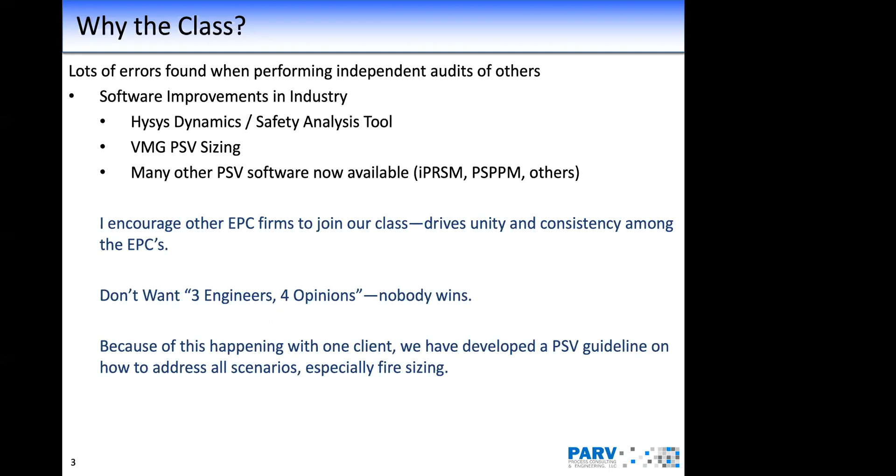One thing I want to point out that's usually a misunderstanding about PSVs and fire sizing is that PSVs don't necessarily prevent the tower or the vessel from yielding or exploding during a fire event.

And again, it was properly protected with a PSV, but the heat of the metal wall temperature eventually yielded to the temperatures and the pressure inside. So please don't think that if you have a PSV on a vessel for fire sizing and it's appropriately sized, that you're not going to have an exploding vessel.

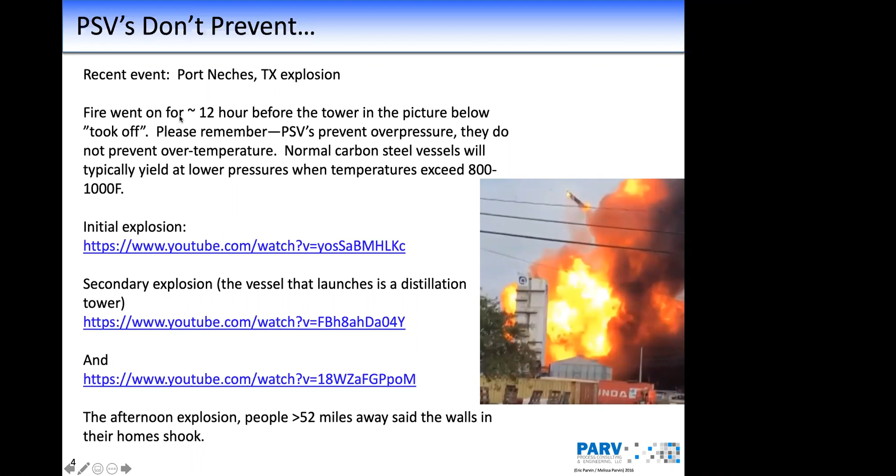I also have in our training class several other events where people are filming a fire going on, the explosion occurs, and then the vessel literally lands about 10 feet to the left of them. It's really something to behold. Not a fun feeling, but if you see a fire happening in your facility, don't be comforted by the fact they have PSVs.

You should just follow your procedures and get wherever you need to be safe. Another thing that we see in the upstream world is a lot of folks actually try to dismiss the fire case. There's no one right or wrong answer, but the question comes up all the time: can I dismiss the fire case? In short, if you're in a code compliant state, you have to follow ASME requirements. ASME says if there are no flammables around, you can dismiss it with appropriate multidisciplinary sign off, and there's some other requirements listed in the ASME code.

A good example of this is like an instrument air receiver that's located maybe 500 feet away from any hydrocarbon source. Maybe you can, in that scenario, dismiss the fire case. If there's any flammables around, though, then the short answer is you need a fire case, period. You need a fire case on your PSV. We have seen several upstream clients dismiss the fire as not needing to size it, and that's just a corporate risk decision if they make that decision.

Fabricators for heater treaters or other upstream common vessels, whenever we're trying to provide a nozzle for your PSV, very often the PSV nozzle is too small for the right size PSV. Special note here: fabricators are not necessarily responsible for sizing this. Sort of like if you buy a tower with an internal flange for your distributor pipe, the question becomes who buys the gasket for that flange? The internal vendor doesn't provide it, the fabricator doesn't provide it. The owner is responsible for making sure that gasket is purchased and installed.

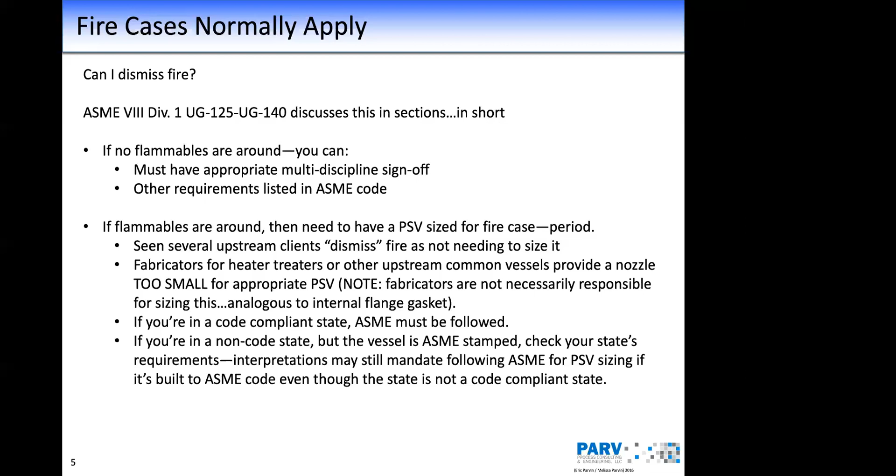So let's get down to the equations, which is what a lot of people love.

We usually have to first determine the heat flux into a material to make it boil. This is a very familiar equation. Your C factor for this equation for heat flux is 21,000 or it's 34,500. The environmental factor we're not going to discuss today. Your wetted surface area is the area inside the vessel where the liquid absorbs heat. Most commonly, we see Q is equal to 21,000 times the area to the 0.82 power. However, I want to highlight there's a lot of assumptions in that 21,000 number we want to make sure people are aware of.

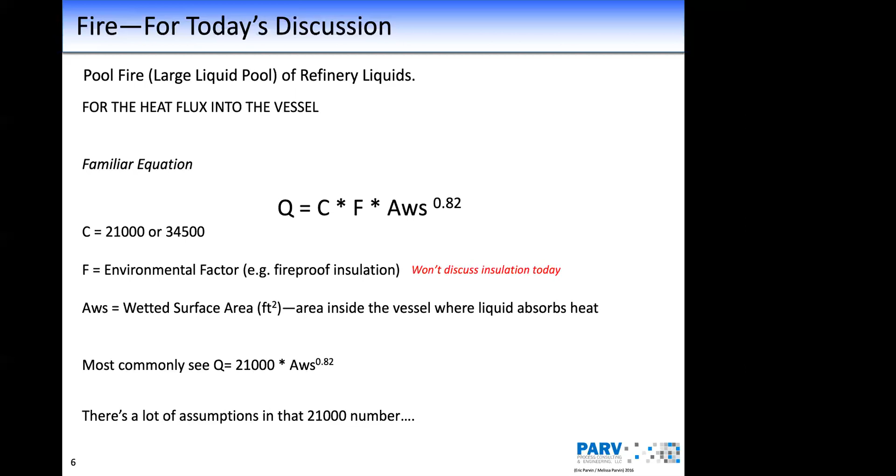If you have both, you can use the 21,000 number. If you're absent of either one of these assumptions, then you're required to actually use the 34,500 number. This is nearly a 65% increase in the heat flux calculation for what's going to be boiling inside your vessel. So please be aware, one of the common mistakes we find, especially in upstream, is that people are just on autopilot using 21,000 when they should be using 34,500, and they underreport the area required by over 60%.

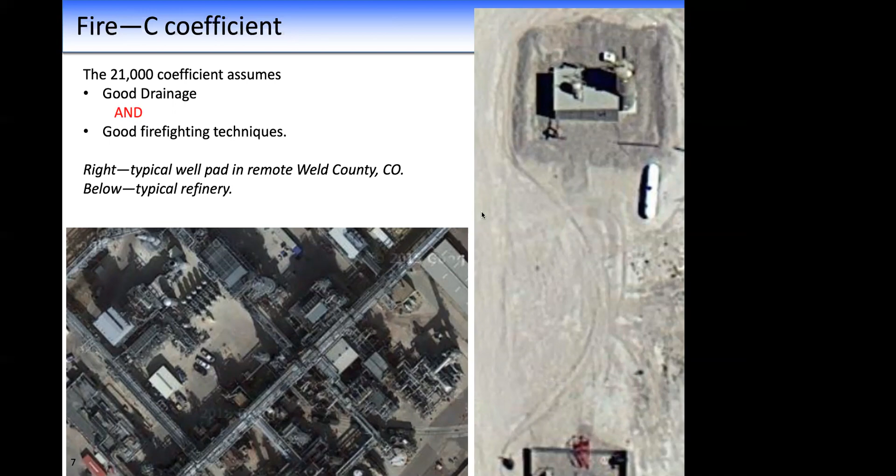Also want to highlight the wetted area factor as a common area where we find mistakes. The liquid level that you assume inside your vessel—oftentimes people just assume the high liquid level, they're on autopilot, and they just move on. What level do you have to use? API 521 provides some good guidance on this.

There's a few references you can look at later. For example, in towers you can use the normal liquid level plus the height of all the liquid on the trays above. For working storage, they recommend using maximum liquid level. In a heater treater, I like to use whatever liquid level is there from the internals—it just depends on your vessel. But if you can use the normal liquid level instead of the high liquid level, for example on towers, you can have a significant reduction in the amount of wetted surface area, and reduce your PSV size required.

Another thing commonly missed is people will include the heads inside of skirts, say for example on towers. API gives you a get-out-of-jail-free card right here, saying you can neglect the area of the bottom head inside of a skirt. The reason is that you don't usually have good air circulation inside, and impingement of the flames on the head in the skirt is minimal, so you can dismiss that wetted area. We see that forgotten many times—that's just another mistake we find.

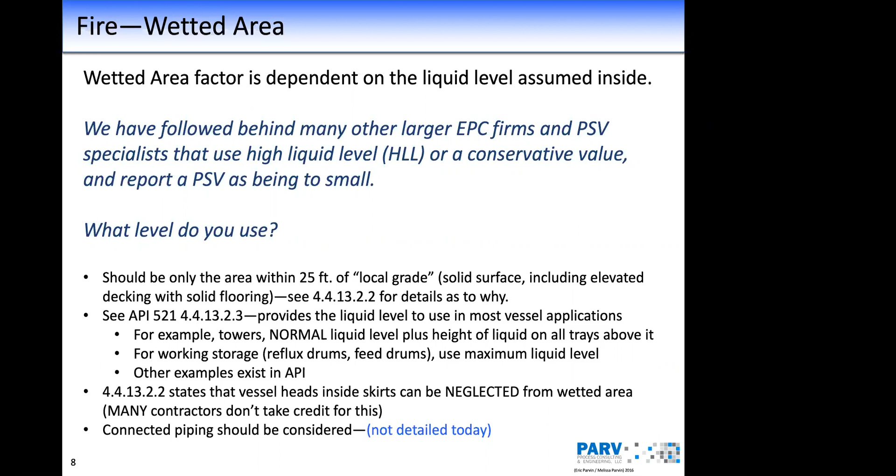Rarely noticed in API 521 in this section is the fact that if your vessel is in a confined area—for example, a heater treater inside a small building to protect it from the weather elements, which we see in Colorado and North Dakota and other places—let's say you have several pieces of equipment inside a compressor house with vessels inside there. Your wetted area calculation, instead of raising the wetted area to 0.82, API says it should be changed to an exponent of 1. This greatly increases the heat flux into the vessel, and it's a common mistake we find, especially in upstream and inside special areas of refineries.

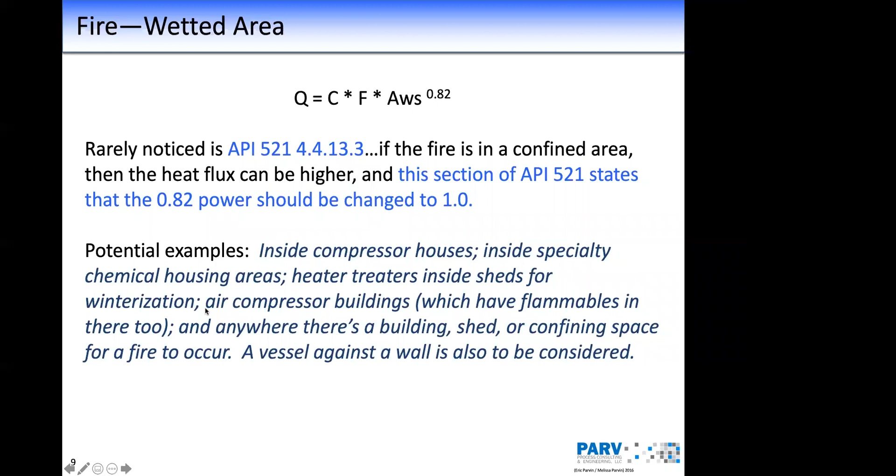Another thing we find is, say you have one PSV protecting multiple pieces of equipment simultaneously. We've seen on about half of the audits we do, going behind other companies, they'll actually add up the wetted area of all the vessels and raise it to the 0.82 power. The right way is doing each area raised to the 0.82 power individually and then adding up all those terms together to get the right answer. On this simple example we have here, it makes a difference of about 20% in your heat flux.

So we've seen people actually miss the heat flux value in some cases by more than 30% when doing an independent audit. Make sure this detail is captured if you have a PSV protecting more than one piece of equipment. API has commented on this previously with inquiries, and they usually get the same inquiry about every 5 years, so it's a common mistake to find, and it's something API does address—they're adding language to clarify this in writing in an upcoming edition within the next year.

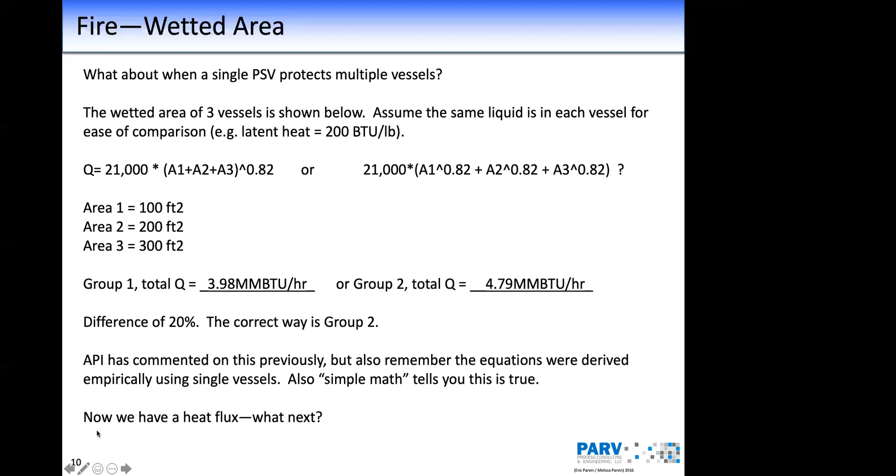So now we've gone over some of the heat flux issues. What's the next thing we do? Very commonly, we just say the heat flux divided by the latent heat, and that gives us the mass flow that we need for the PSV. One of the hot debates we come across a lot, from engineering company to engineering company, is: what is the latent heat?

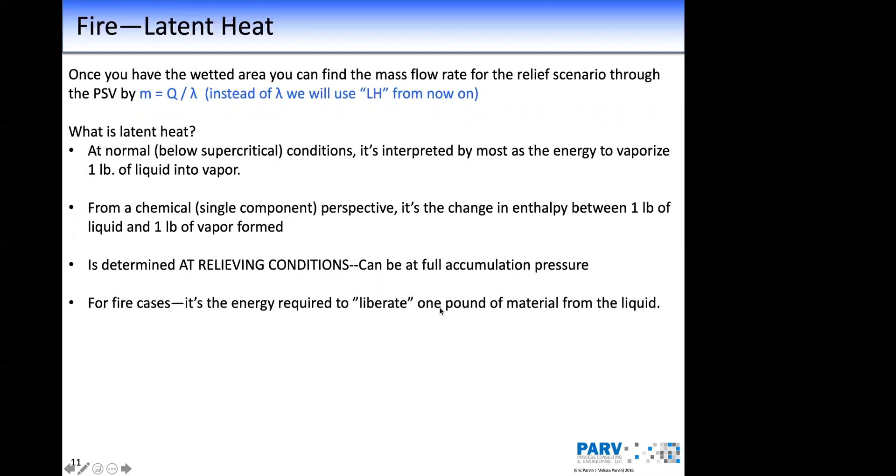At school, it's the energy required to change 1 pound of liquid into a pound of vapor. However, for a multi-component mixture, this becomes a little trickier, especially for a fire sizing case. So we always want to make sure that we're liberating 1 pound of material from the liquid to determine our latent heat.

API discusses this in this section of 521, and it goes through a lot of paragraphs to say ultimately there is not a standard latent heat effect, but sometimes you have degassing or dissolution effects causing a higher latent heat than what your simulation property tab will tell you. Also, there's a paragraph saying that multi-component mixtures have a wide boiling range, and it might be necessary to develop a time-dependent model where total heat input to the vessel not only causes vaporization, but also raises the temperature of the remaining liquid, keeping it at its boiling point.

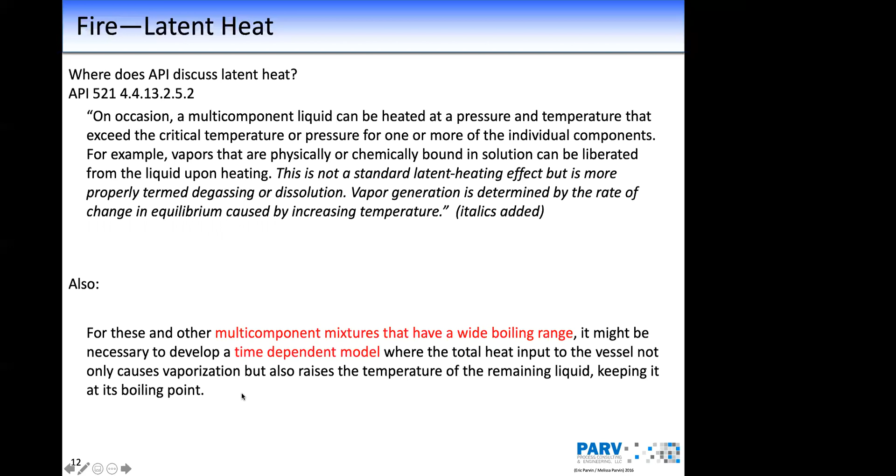In other words, you have sensible heat effects going into a multi-component mixture of liquid that's being boiled. So you actually need to consider the MCP delta T as well as the M lambda H. Most engineering companies look at just the latent heat effect, or your lambda, and they ignore this MCP delta T. Now, is it wrong? Not necessarily, but it's very conservative.

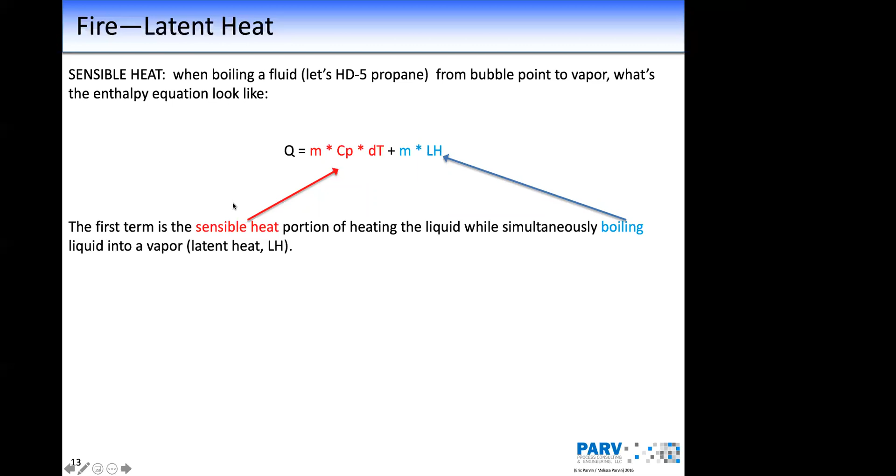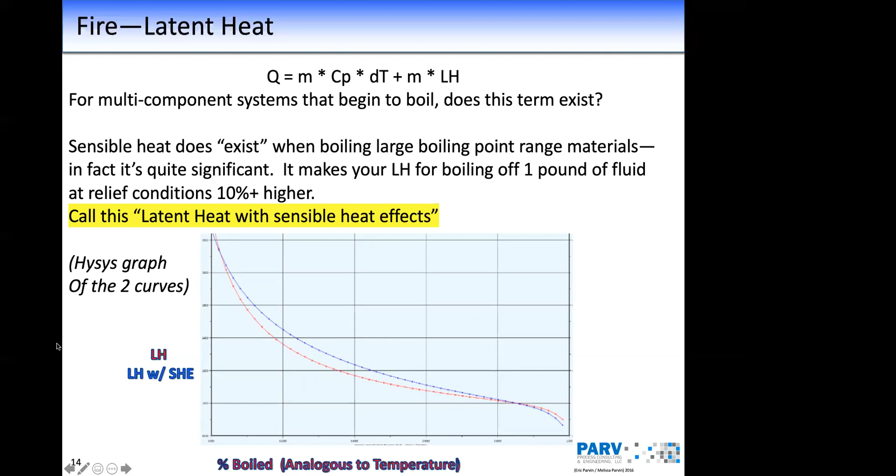And even with the stream being mostly propane, you do see this effect occurring. This specific example, the latent heat with sensible heat effects, is approximately 5 to 10% higher than the latent heat out of the property tab in your stream window.

For multi-component systems, the other thing we need to remember is, as your temperature increases and you're boiling more material off, typically your PSV area required increases. But also, as your temperature increases, the latent heat reduces, so your PSV area required increases a little bit more. As your temperature increases, molecular weight increases, so your PSV area required according to this heuristic decreases slightly.

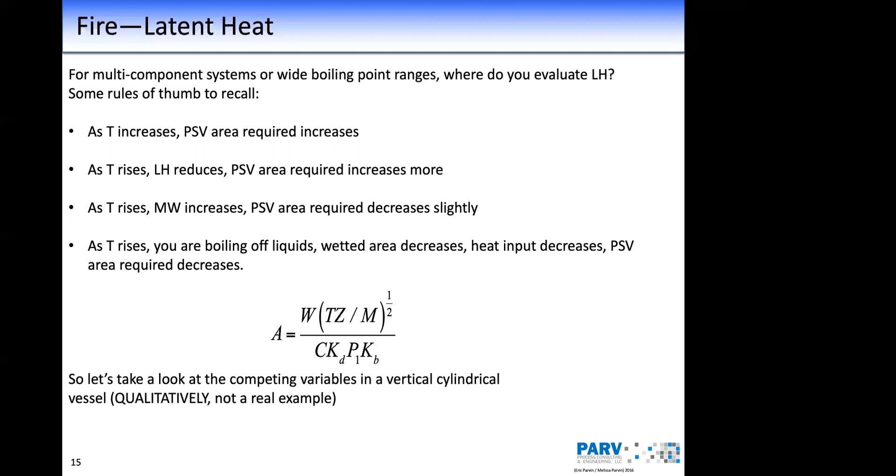As temperature increases, you're boiling off liquids, so guess what? The other thing changing is your wetted area is actually decreasing, so the heat input decreases, your PSV area required decreases. So you have a lot of moving parts that you need to try to consider simultaneously, and it's actually difficult to do by hand.

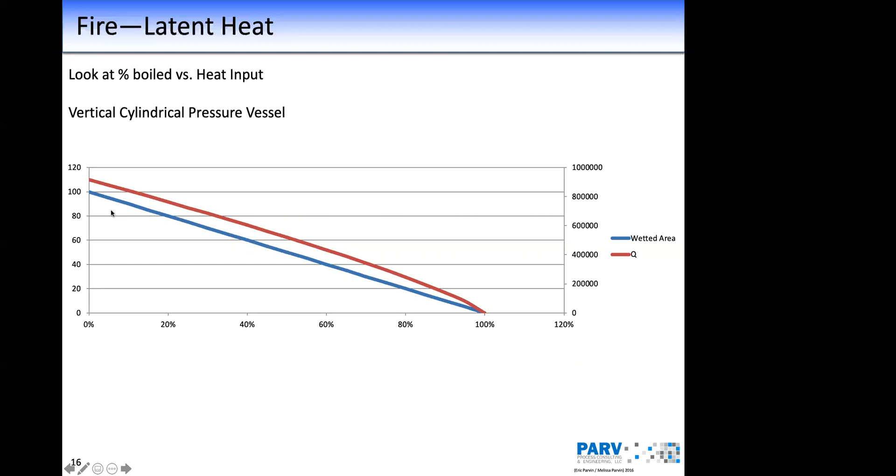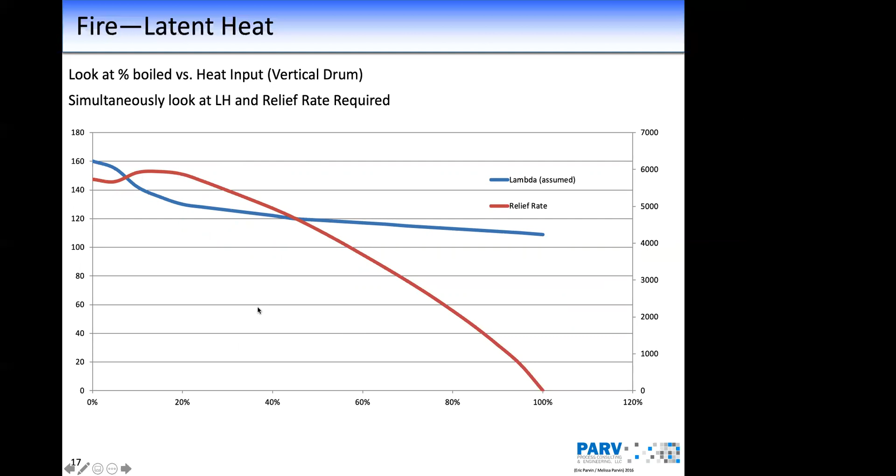So we're going to walk through some examples of what that would look like if you did try to do this by hand. Here's a very simple vertical cylindrical pressure vessel. If you look at the amount of liquid boiled off versus the heat input, these are what the curves look like. If you were to look at the latent heat in the blue curve and the relief rate required in the red curve, you see you actually have a mass flow peak around the 15 to 20% mark.

So that's a little bit hard to estimate by hand, but you can if you do a lot of work on it. Ultimately, though, what you're trying to go for is the PSV area required as you're boiling off that material inside the vessel.

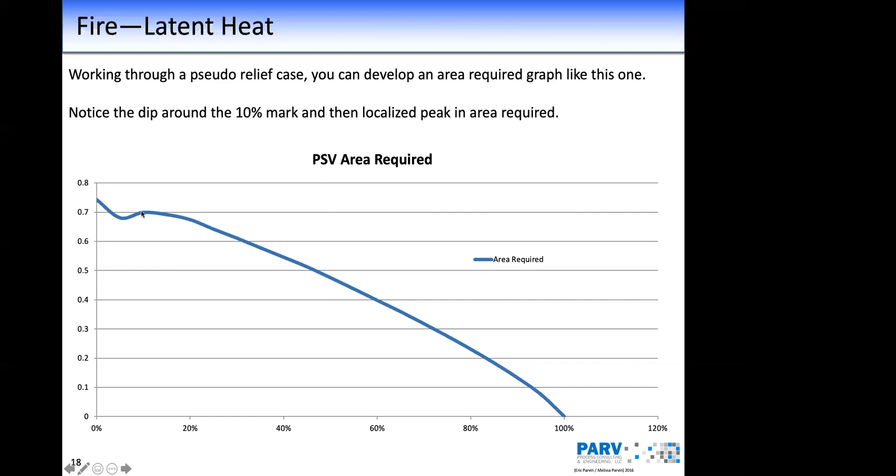We tend to ignore the first 1 or 2% because the amount of liquid boiled off in order to bring the vessel to overpressure would usually consume this first little bit. In this case, our peak looks like it's around the 10% mark. However, we have seen curves that look like this, where your PSV area required peaks out usually somewhere beyond the 20% mark. This green curve, I have the example of here shortly.

We have come across this in refineries quite often, especially on diesel systems, where your area required peaks at somewhere between the 30 and 70% mark of boil off. So please understand, if you or your contracting firm makes a decision just to use the 10% mark for boil off, you might be missing the peak area required.

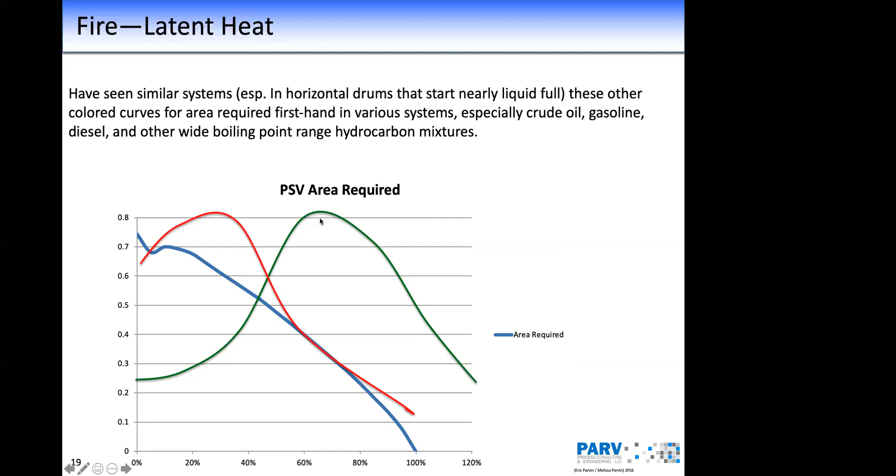So how do you actually determine that? There are 4 popular ways we've seen in the industry over the last 20 years.

If methane's involved, you're talking negative hundreds of degrees. We've seen people set up 100 drums and 100 latent heats. We don't show that here—it's very tedious and requires a lot of time. You can also set up a case study with 1 drum and walk through the procedure we have here. This picture is available if you want to geek out and set this up later. That's what we call method D, our preferred method to determine the true latent heat for a fire case.

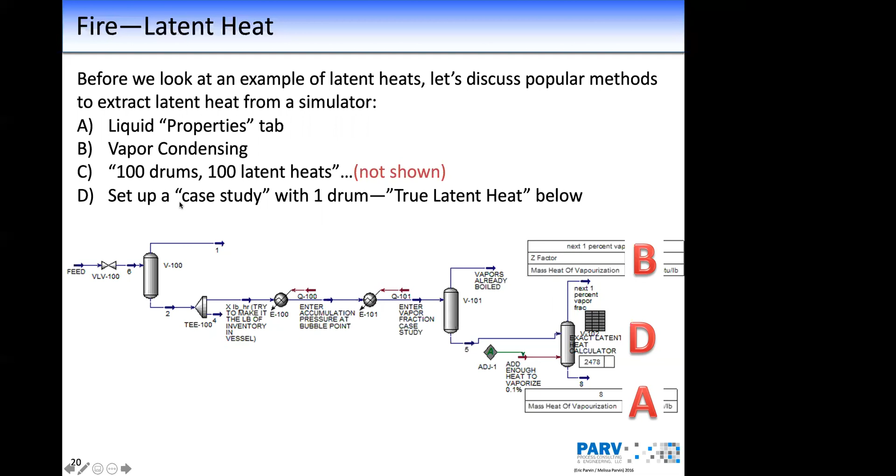The other thing to point out is with methane concentration, which is very common in the upstream world, your latent heat from method D is going to be very different between method A and B. Your physical property tab—taking a pound of the entire liquid and vaporizing it—tells you, in this case, 167. The vapor being liberated and then recondensed tells you 393. These are two very different numbers, two very different approaches.

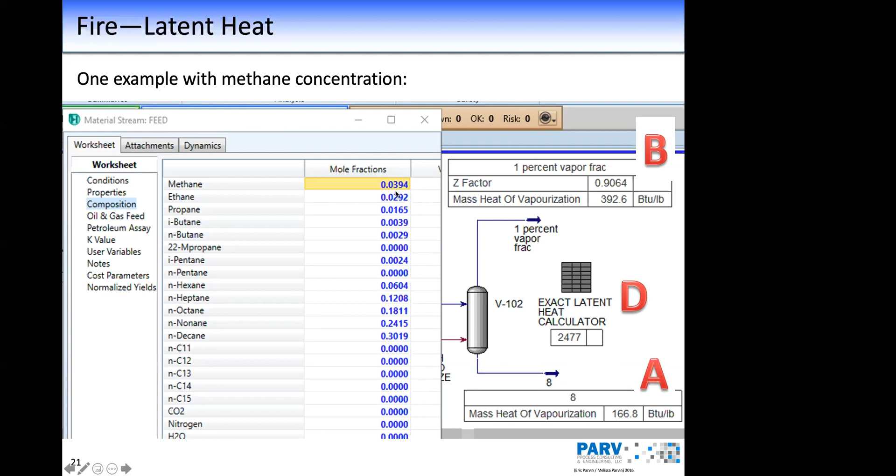Whereas the number we come up with says 2,500, which is a lot higher than water. Immediately a lot of people think, wait a minute, that's got to be wrong. But in reality it's actually correct, because you're fighting dissolution and not necessarily a true latent heat. So your curve across the entire boiling point range is going to look like this when methane is involved.

Now why is this important to know? For sizing a PSV, for example, on a heater treater or anything in the upstream world, this dissolution effect is significant. It can cause you to have a much smaller PSV than what some EPC firms will tell you to use, especially if you're using the property tab window out of the simulation. Down at the 50% boil-off range, you're off by a factor of 3 or 4—it's a significant difference. So definitely consider this if you're seeing large PSVs being cranked out by your EPC firm.

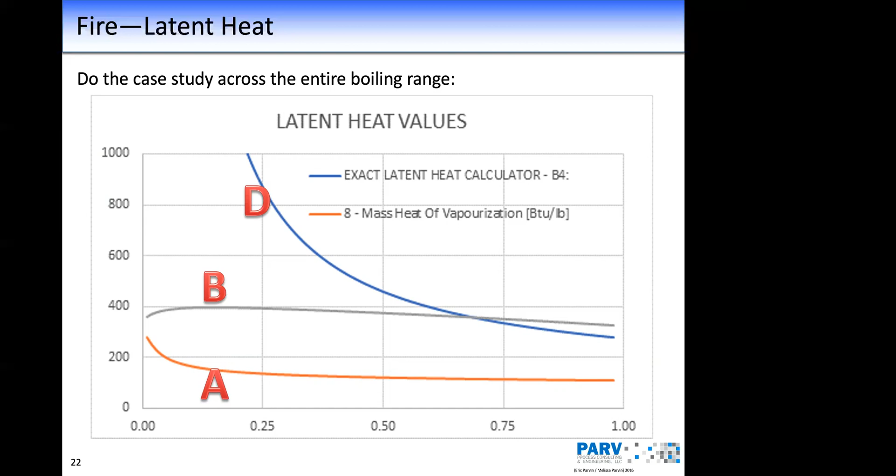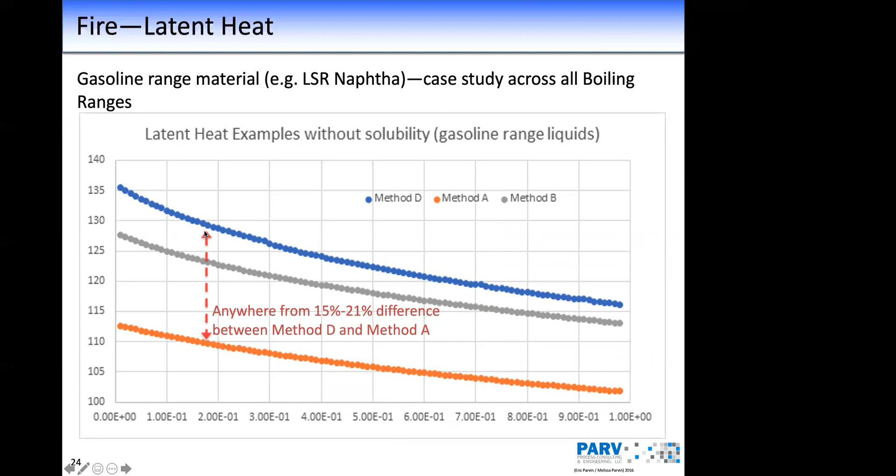Let's shift to gasoline range material. How different is the effect? In this case, not as different, but it's still about a 15 to 20% difference between using the physical property tab and actually calculating the sensible heat effect. So for methane solubility, if you have ethane, like in a fractionation, it's still a big difference, especially in the first 10 to 20% boiling point range.

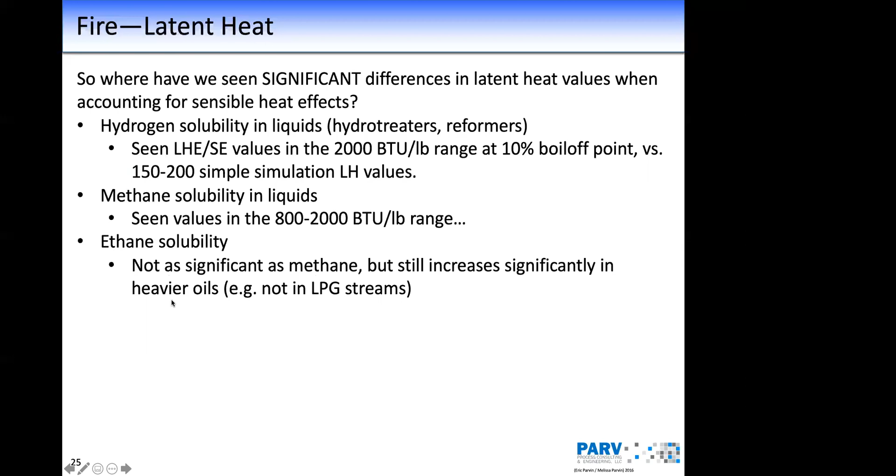How do you review this detail yourself? A few options in the industry exist. HYSYS actually has a really good safety analysis tool. You can program a PSV, put in the properties for set point and all that. So long as you don't cross the supercritical range—HYSYS defaults at your compressibility factor being less than 0.8—you can run a semi-dynamic analysis. You tell it vapor, semi-dynamic analysis, click on the edit flash table, and you get this report.

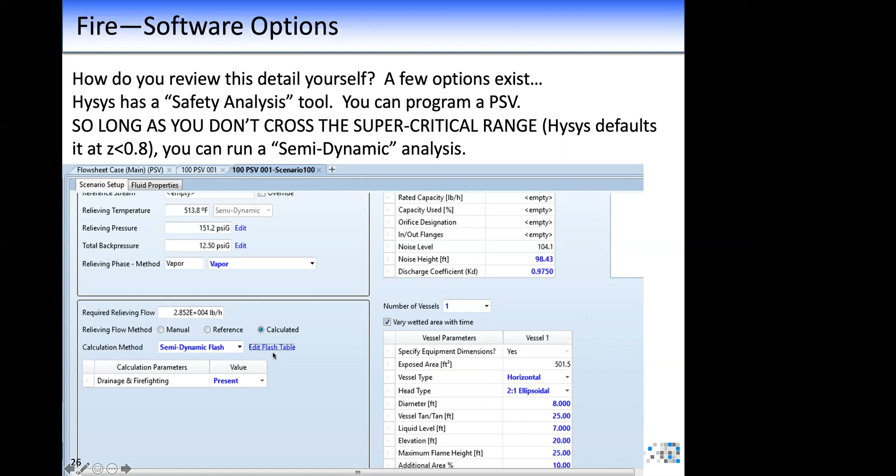This is for diesel. For the first 10%, which is where a lot of companies just stop evaluating the fire, you get an area required of 0.36 inches squared. But really the controlling point is when 60% of the material is boiled off. It happens an hour and a half after the fire starts, but it's your maximum PSV capacity. We actually go a little past the J-size PSV according to API sizing. So this is the kind of tool available to you in the market—it's very easy to use and relatively intuitive.

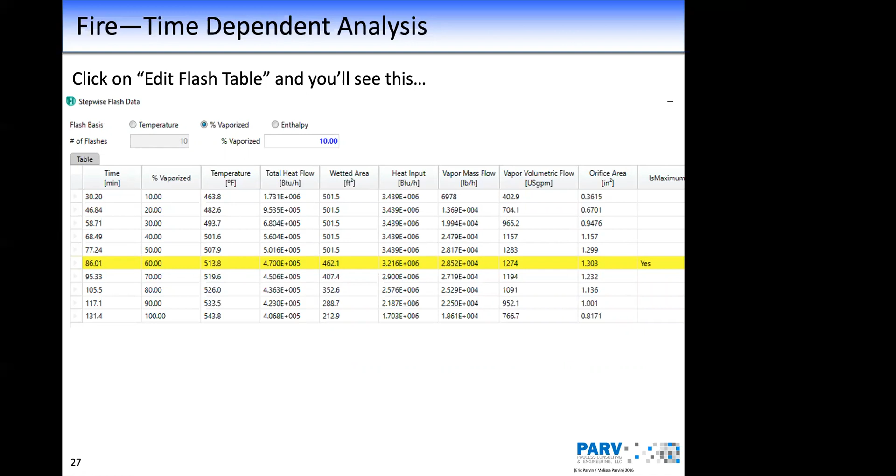However, it's extremely conservative and requires some manual intervention to get the right answer. If you're using iPRSM, please use it with a grain of salt and do some quality checking. It doesn't consider the reduction in wetted area as it goes down, at least not that I'm aware of. I've never come across a client that knows how to look at that properly to reduce the wetted area while the fire goes on. It does a good job evaluating the other physical properties, but be careful believing its final result without doing some scrutiny.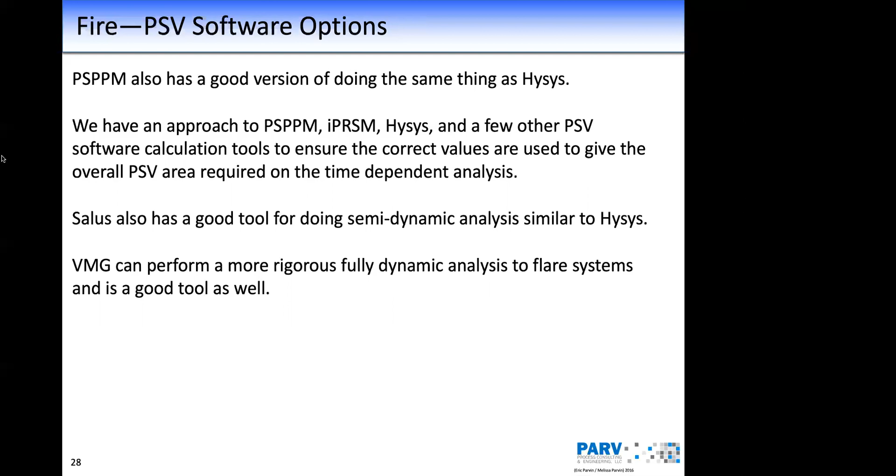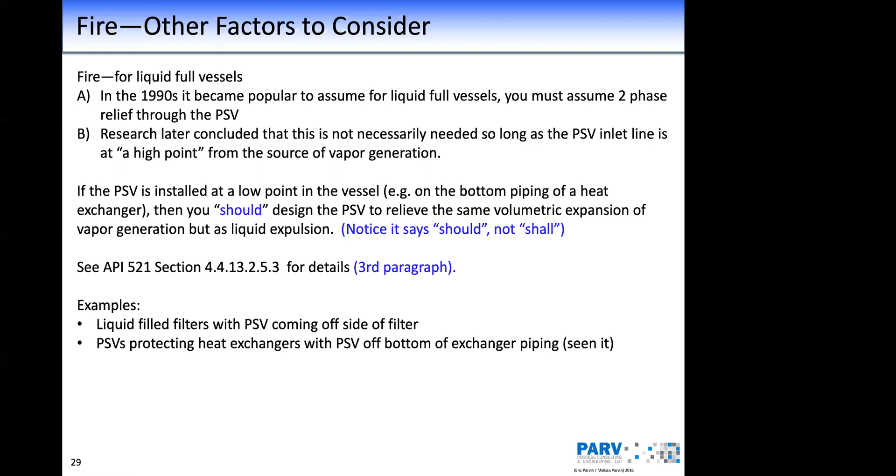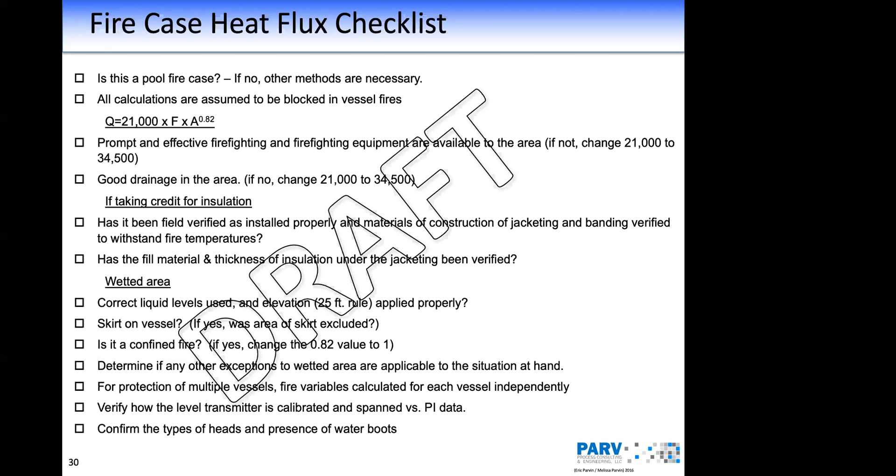If you want, here's a checklist that we developed for Flux. We also have some checklists on other things, but this is a good little QA we've talked about today. And with that, we've only scratched the surface, but we wanted to see if anyone has any questions about fire case or anything else.